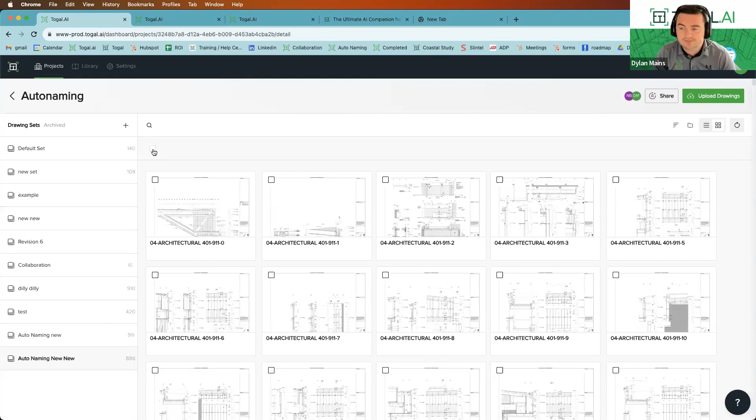So starting off with our auto naming. In most softwares out there today, you still have to name your plans one by one. Togal has created auto naming, so this will save you some hours at the start of your takeoff process. Togal is also cloud-based, allowing you to log in from anywhere. You can start on your work computer and pick up where you left off at home on your home computer.

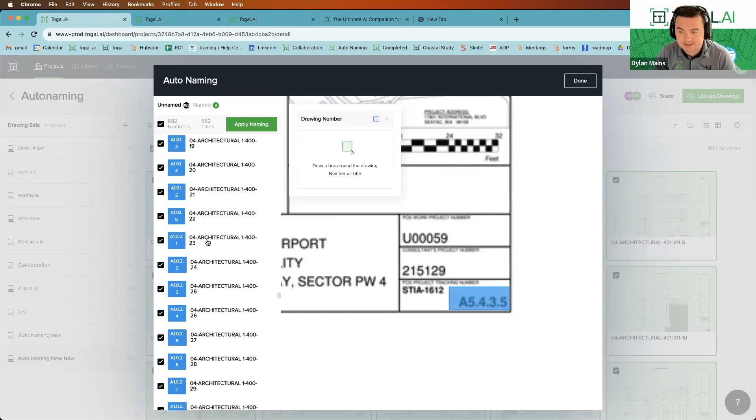For the auto naming, all you'll need to do is point to the number down here at the bottom right, set it as a number there. You'll see instantly, this is like 882 pages, I just numbered them all that fast. And then same for the title, just point to the title block, and voila. So much faster than even some of the softwares that do have auto naming, it doesn't work this fast. It's pretty incredible.

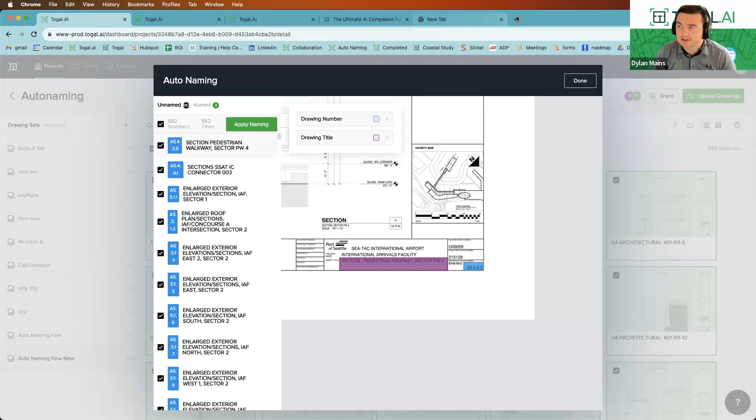The next thing I'll show here is our collaboration. In some of these larger projects, being able to work together is really important. Obviously this is an elevation, not flooring here, but hopefully you get the idea. With Togal, you can have multiple estimators working together at the same time, even on the same plan at the same time. You can see we can work here in separate views, like just one person uploads the plans.

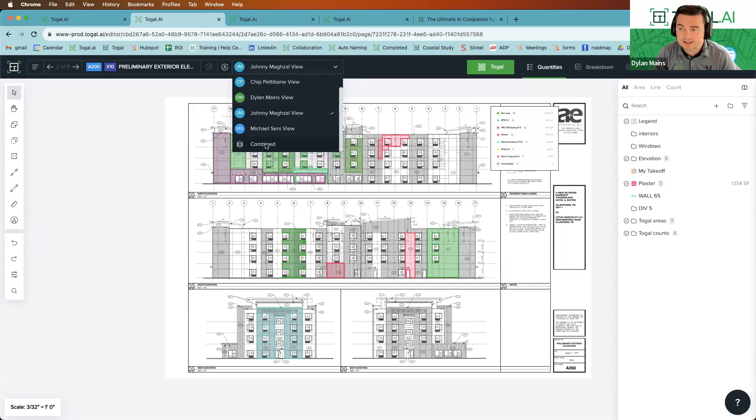You just invite your team in, set their different permissions here, and then we can start doing takeoff. So you can see what I did here versus what Johnny did. We can combine all 4 estimators' takeoffs on top of each other to see where we're at as a whole, and we can export together as well.

Like on this example here, you can see we actually missed some areas, but it's really easy to catch that. Being able to overlay all the takeoffs on top of each other versus working in separate environments, some of that stuff can easily fall through the cracks.

And then from there, getting into some flooring specific stuff here. Even before you start doing your takeoff, you want to first just understand the project. Is this even worth our time? Is this a job we want to go after? And this is where Togal GPT can help.

Togal GPT is Chat GPT-4 built into Togal. The biggest difference here is that it's extracting all the text from any of the documents you've uploaded - your plans, your specs, your contracts, etc. - and interpreting it. So you can ask a question like 'any info on interior finishes' and it'll summarize all the different interior finishes it found throughout the project, and even give you references to those pages so you can go right to them. I also said create a bullet point summary of flooring for this project.

In this case, this is ideal, right? It's all the same flooring throughout the entire job, but that's what we got here. And then again, referencing all the pages that are referencing LVT. This is a big multifamily project. And then I had it also create me an RFP for flooring based on the information it found in the project.

You can also leverage this to write RFIs too. Like say, for example, it didn't have the brand of LVT that was specified. I could say, create me an RFI on behalf of XYZ company, directed to the architect, requesting more information on the manufacturer of LVT required for the project, and it'll write out a whole RFI for you.

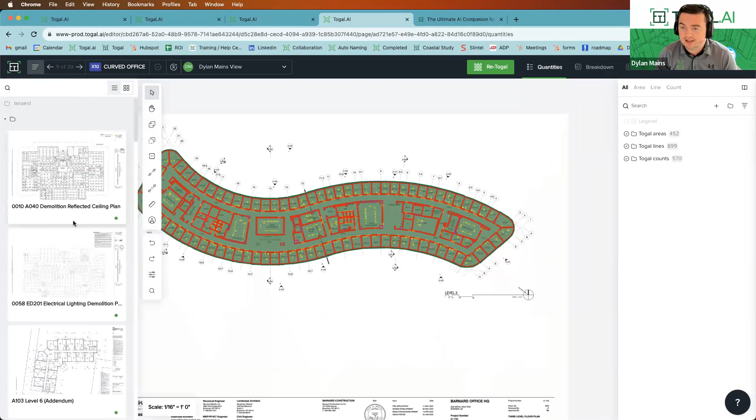So this plan here, Togal did all of this here that you're seeing automatically. Let me show you though on a bit of a smaller plan, and we'll show you how this works from start to finish for flooring. I'm going to erase all this here.

So with most softwares out there today, you have to come in here and click and trace all these rooms out, right? For flooring, go to the half mark of the door lines of the doorways, and it's going to take like a half hour to an hour per plan.

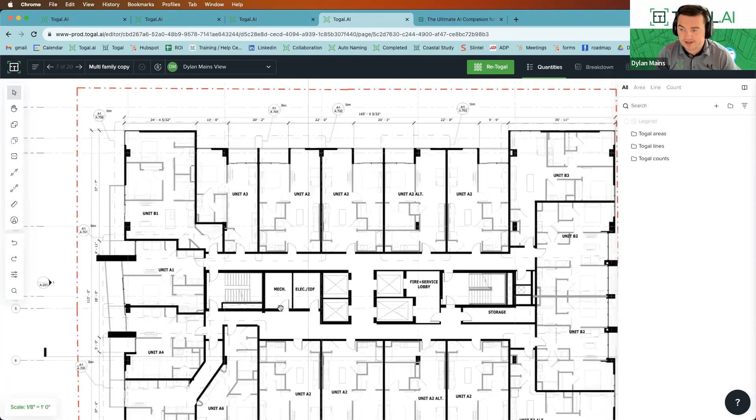With Togal, we can cut that down dramatically by leveraging AI. So I click the Togal button here to give me some options of what I want to pull on this drawing. So I can get the net area, gross area, footprint, door areas, the walls, and also all the count objects. I'll click go here.

I'm just going to run everything for this example. And just like that, let's turn this legend off as well. But it's done a lot of things here. So it counted all the different objects that it sees in the plan here, the toilets, the sinks, etc.

which maybe in the past it's not something you guys even counted, was all the toilets, for example. But now with Togal, it does that, and obviously there's a bit of extra labor, like extra cuts when you're cutting around a toilet hole in the ground. So you've got that now, so you can kind of factor that into your estimates.

All the doorways as well, that's your transition strips typically. So you've got that, and then all the walls, you're doing wall tile, that kind of thing. We've got those drawn in for you, and then the areas here.

So we'll focus on the areas here, obviously. So we got net area, footprint, gross area that goes to the half mark of the interior walls, the edge of the exterior walls. But for flooring, we'll focus on net area.

So I'll click on the net area here, and then I can right click and click auto classify. What that's going to do is auto classify my different room types. So now I can fly through a takeoff.

So it separated my bedrooms, my stairs, my living areas, my corridors. And notice every click there, by the way, is like every dot here is a click. So it just did hundreds of clicks for me, saving me a lot of time.

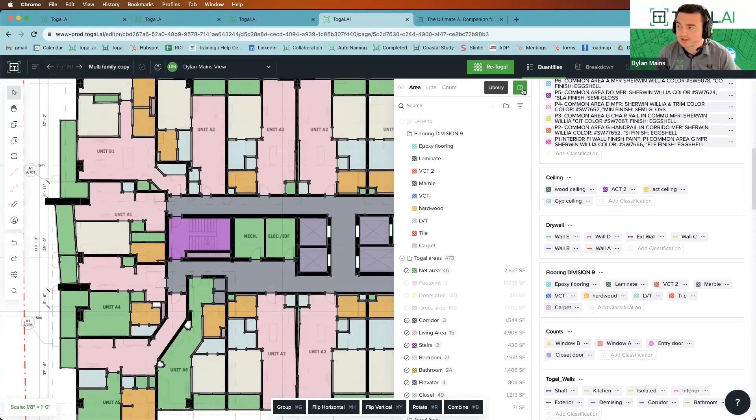See, I've got my different flooring types here. This example, we'll just kind of run through and do a quick takeoff. So let's say all the bathrooms are going to be tile.

One of the cool things with tile, for example, and I can create this from scratch as well. Let me just edit this one though to show you. In most softwares today, you've got to not only measure the tile in each bathroom, for example, but then you also have to measure the tile base.

With Togal, not only does it measure it all for me, but I can get three quantities on one condition. So I can get the area for my tile, my perimeter for my tile base, and even a tile count factoring in the grout lines. So saving you time there.

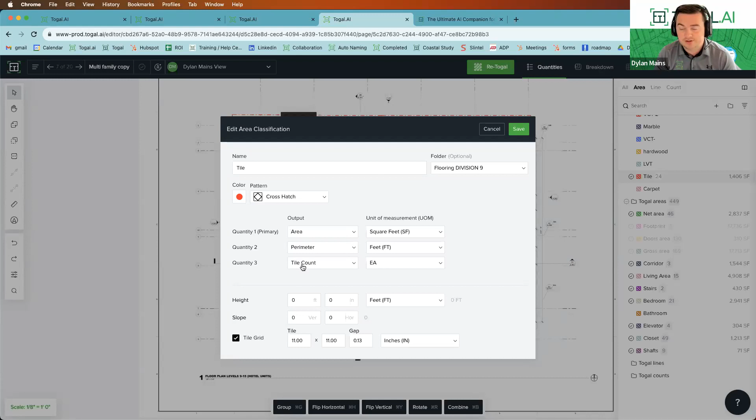Like in most softwares, again, you have to click it, you have to trace those rooms out twice. In Togal, you don't even have to trace the room out once. So I just took all the bathrooms there.

We'll do the living areas. We'll say these are going to be VCT. And then we'll say all the bedrooms are going to be carpet.

And what I see a lot of customers do is while they're doing the takeoff, because Togal is kind of opposite, right? It's measuring all the rooms and then you're telling it what goes there, versus telling it what goes there and then going and measuring them in most softwares.

So what you'll do is you can just turn off what you've done so far and you can see this is what I have left. I've already knocked out a big chunk of this takeoff.

All I have left here is the closets and the corridors. And I can label these here real quick as VCT2. And then I'll do this corridor here as carpet as well.

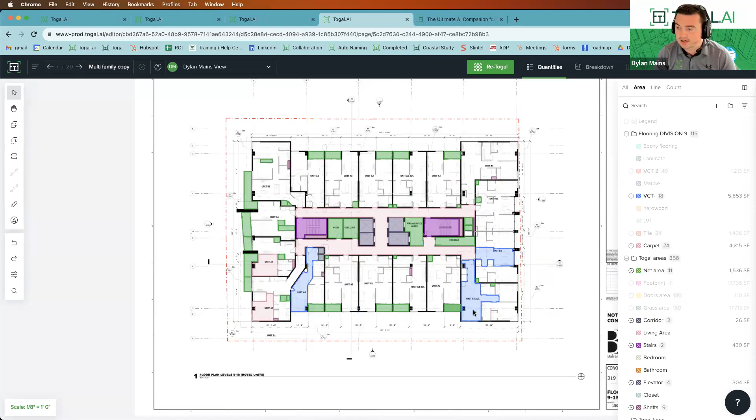And I missed a few areas here, but I can easily add those back in. These were the living areas, and these are some of the bedrooms it missed. I'll call this carpet. And I've pretty much taken off this entire plan that fast.

So no matter how complex the plan is, no matter how big the project is, it's always going to be this easy, basically because it's done all the clicking for me. I just have to tell it what goes where, and it speeds it up drastically.

One of the things you'll run into sometimes though is because Togal looks for doorways to split off areas. So it's looking for a doorway and it knows that's a separate area. But let's say this lobby area here just so happens to be a different type of flooring. How do we deal with that?

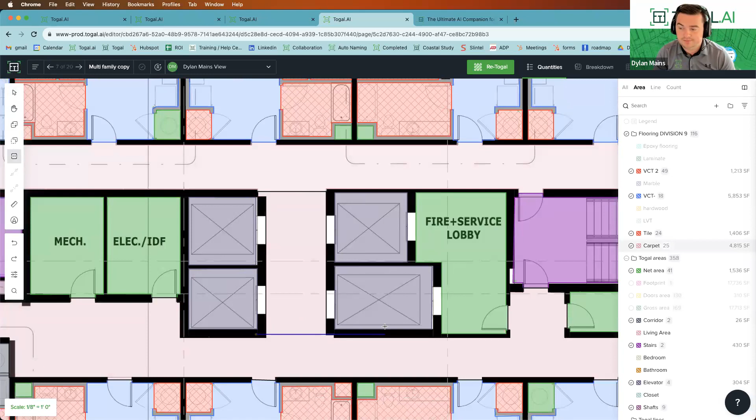So Togal made this one big area, right? What we can do is use our split tool. Come over here, click on that, or just press S on your keyboard. You can just drag a line through, and then drag a line through here. And this area here can be tile, for example, while the rest is still carpet.

That is pretty slick. We kind of ran through that quickly. Obviously, there's a lot of other stuff I can show you, like our cut tool. You can cut, like let's say it's carpet on the edges and tile in the middle here, something like that.

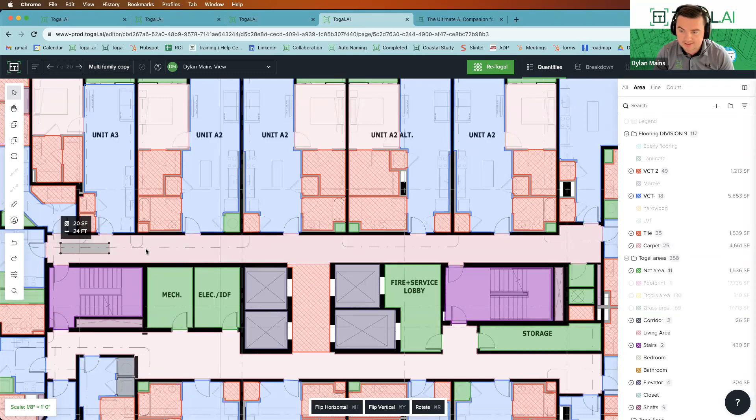And maybe it's like every so many feet, like this. I can cut that area out, copy that, and then paste it down the hallway here. Press Control Shift V, it'll paste it equidistant over and over again. Then I can click on one of these, assign and fill these in with, let's say this is like getting a patch of tile as well, all in the hallway, and there we go.

So it's cutting that area out from the carpet, and then separately I can fill it in with whatever needs to go there, versus cutting it out and then having to separately trace that area out. Some of the other random things, you can actually cut from an edge. A lot of softwares out there today, you cannot do that. So if I need to cut out this section here that's not going to be floored, I can just do that, no problem.

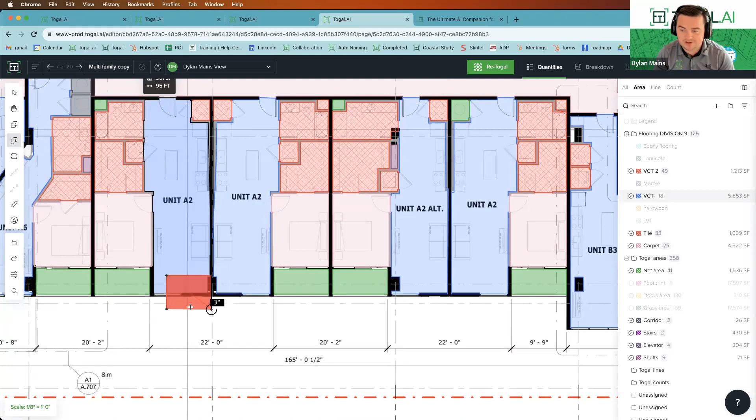You can merge areas.

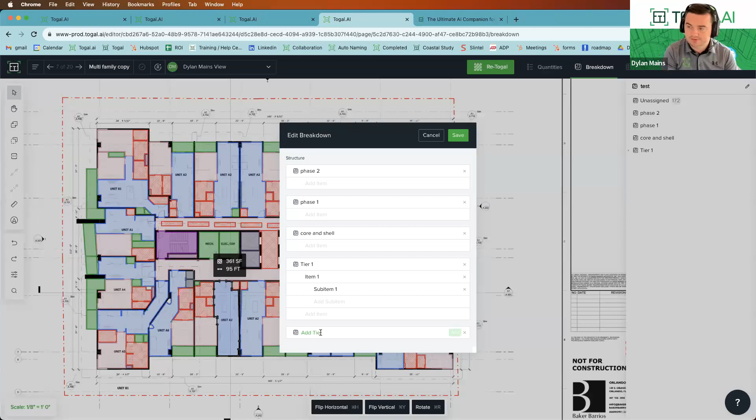Then from there, I'll show you our export tool. So you can set up breakdowns, like say there's different phases of the project here. So I'll create a phase here. We'll just call this phase 1, phase 2. I kind of already got that set up actually. We'll just roll with that.

Let's say this half here is going to be part of phase 1, and this bottom half here is going to be part of phase 2. Now I can isolate between those separately, and then when I go to export, I can leverage that to kind of segment my data how I want it.

So in Togal, you can export multiple drawings at once. You can add in multipliers for your typical floors, typical units, that kind of thing right here within Togal. So I'll just say times 5 here as an example, and you'll see everything updated there by 5.

And I can group my data by drawing, so that's everything in this drawing here, but then by classification. We'll do it by breakdown tier, so that's the breakdowns there, and then by classification group. The grouping there is my folder, so now I know in phase 2, for the flooring division 9 section, here's what I have. For phase 1, here's what I have.

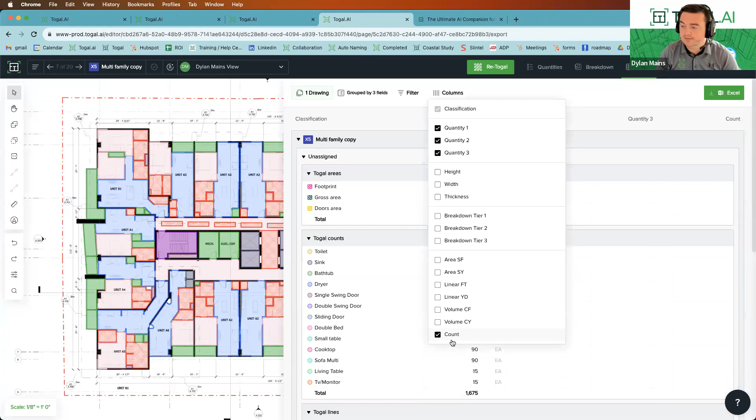I can copy and paste right from here into Excel. One of the cool features I like too, you can add in a column here for counts. See there, and now I know not only how much square footage of VCT do I have, but also across how many individual sections. In this case, there's 40 sections of VCT, a bit more labor than if it was one huge section, obviously. So factor that in for my production rates, export this to Excel, and then start putting prices and stuff.

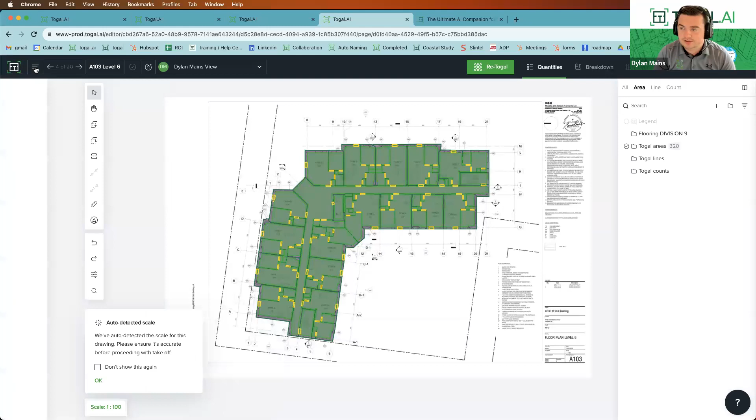The last thing I'll show here is our comparison tool. So when you get new revisions or addendums, how do you find what changed? Again, Togal being cloud-based - let me fix this alignment here. We do have automatic alignment as well.

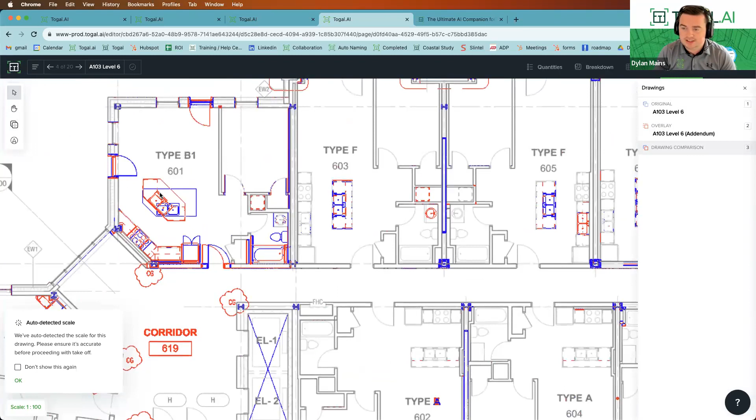So you can see here, the original is blue, red is the addendum, and some of the stuff's really obvious, like that island changed. But some stuff's not so obvious, like this bathtub here - what exactly changed there?

So we have a keyboard shortcut. You can press T on your keyboard to toggle between the two revisions here, and quickly see. Obviously, they added a knockout wall there.

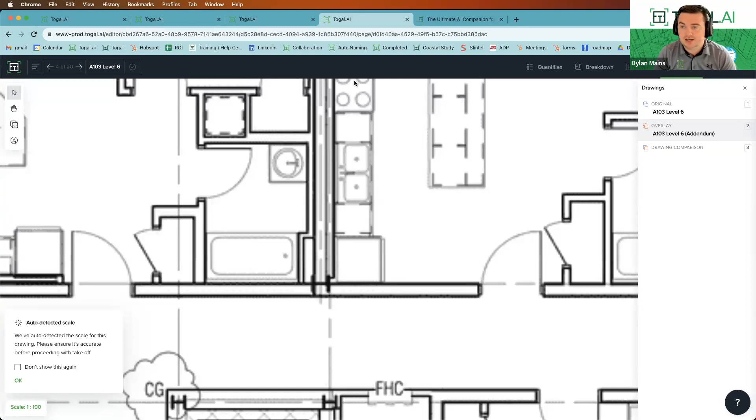And then I can open up another tab and put that on my other window here and make the changes to the takeoff. You can have as many tabs open as you want of Togal - it's not going to really slow your computer down. It's cloud-based, it's a lot lighter on your computer. You can also export the PDF with a legend as well.

Any questions so far? We're also happy to do a custom demo of Togal from your plans as well. You can come to our site and book a demo right on the homepage, and we're happy to show you a custom demo from your plans to show you that it doesn't just work on our perfect demo plans here - it works on all plans.

Oh, someone's raising their hand here. You can just type your questions in the chat, or I guess I can allow you to talk as well, it looks like. Got one in the Q&A here, I see. Oh, I see Q&A, okay. Hey, it looks like chat is disabled. So, oh, you want it in the - oh, Q&A. Okay, I'll put it there instead.

How would you account for wall tile? Yeah, so let me go back here. All the zoom things stuck in my way. There we go, I'll go back in here to the walls.

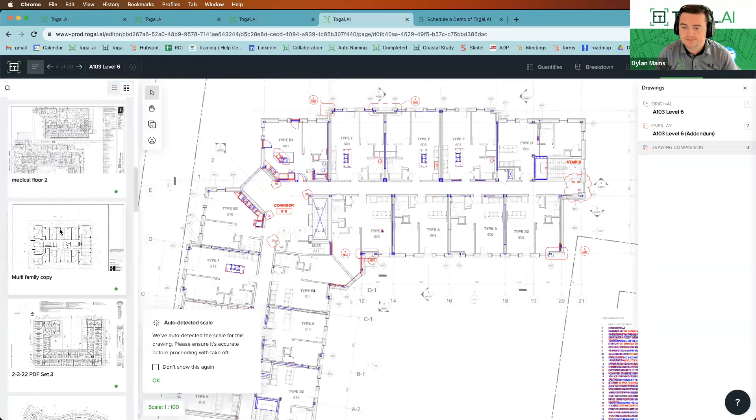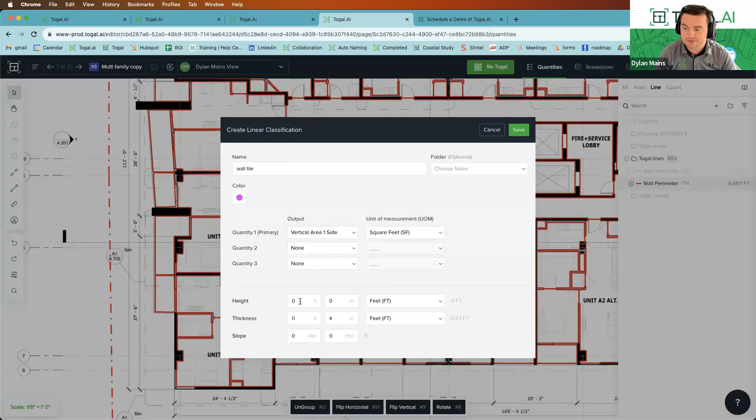So a couple different things here, because like I showed you, it does draw the walls in for you. So you've got the wall perimeters, which is like the room perimeters here. So I can click that whole room - if it's all getting wall tile, then it makes it really easy. I can just click on this and wall tile - I need the vertical area, one side of the wall. It's going up 4 foot of the wall, and 98 square foot of tile there.

If only one of these walls is not being tiled, I can ungroup this in this case. Let's change this back to wall perimeter. The other option is we can use our wall center lines here.

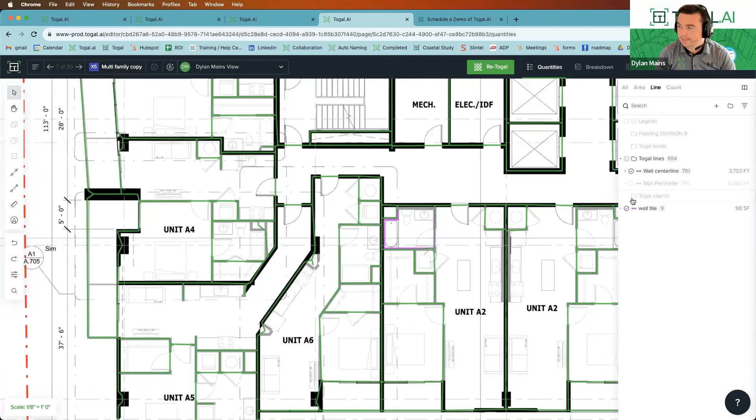We also have auto classify for walls as well, where I can right click on this, click auto classify. It's going to separate my different wall types out, and it does do a pretty good job of getting my bathroom walls there. There's a few it might need some edits here, but just to quickly do this, I can right click on all these, and I'm going to call these wall tile - voila, less clicks, and now I can isolate to just this and see what else I need to grab. Maybe there's a few here that I need to do some edits to.

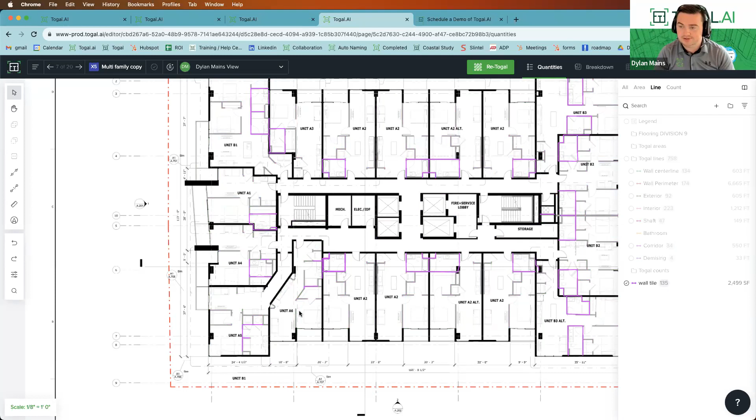All the same manual tools you've got in other tools here, just keep in mind we have as well. I can manually do a takeoff in Togal too, like that. But yeah, hopefully that helps.

Few others in the Q&A there. Don - the window treatment one, I can show you that in a second here. Joe - I love how seamless and fast it is, will there be a tile size and waste calculation in the future? We do already have tile size, actually. I know I went really fast, sorry, I just need to slow down a bit probably.

Let me show you that - oh, it's under the flooring here. So that's VCT.

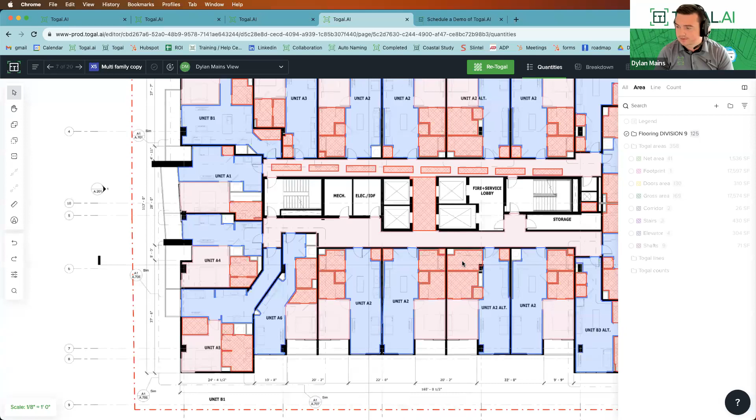So on my tile condition here, I also added a quantity 3 for tile count. I put in the size of my tiles, the size of my grout lines, and then I can save that, and it gives me the tile count. On quantity 1 here is all that shows on the export on the quantity pane, but when I go to the exports I'll see quantity 1, 2, and 3, which is quantity 3, there was my tile count. I can see here quantity 3. So there's 3,330 tiles needed there.

But waste factors, that gets into the estimating side. Our focus now is saving more and more time on the takeoff. That's where a lot of time is monotonously spent, and we want to speed that up as fast as possible. The pricing is where you want to spend more time, finding ways to value engineer and get your prices down.

Tile patterns, that's something we can discuss. Carpet tile, yeah, same exact way. You just put the dimensions of your carpet tiles or your VCT tiles, and it will calculate your tiles.

Oh, window treatments, let's show that real quick. This is actually our newest update. Just a couple weeks ago we added this in, and I was not prepared for this, but I can pull it up quickly. Window demo here. So we now have image search as well as text search that you can use on plans. So you can leverage this to quickly search those window tags and door tags for your blinds.

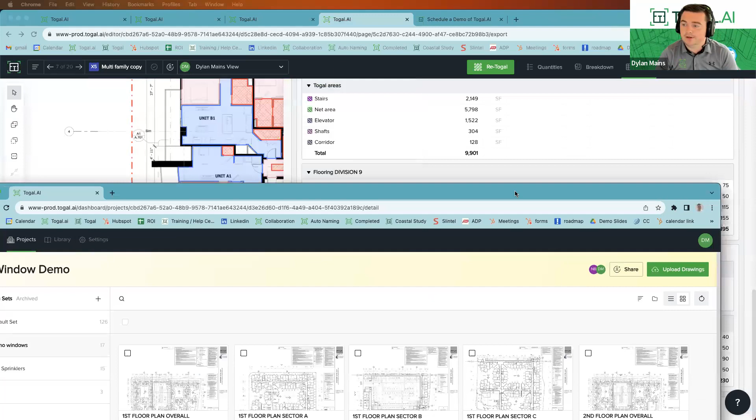Let's back up here. All right, so on this one here, this is an example where you've got the window tags labeled in there, so that's ideal, right? You've got the W6, the W5, etc. So in Togal, we have text search. I can just type in W6 here. It gets all of them, all 57, and I convert that to my W6 windows.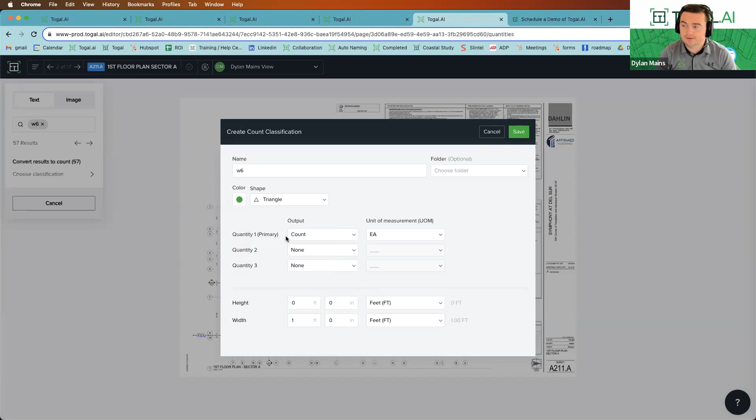Maybe that's a certain size blind. I can put in my dimensions of that. I can pull some measurements on those and save it, give it a different color, shape, etc. And that fast, I can get all my W6 windows. You just do the same thing for each different window tag.

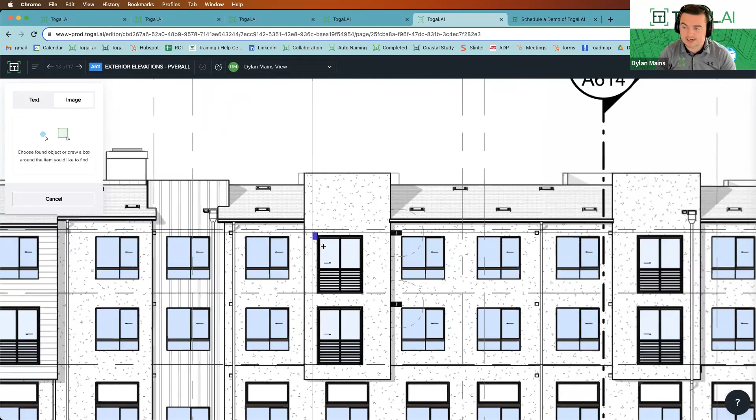The other option, this is our newest update, is now we have image search as well. And this is really cool. So you can search, say there's no tags on windows here. As long as there's an elevation, I can come to this, point to one of my sliding glass doors for example, search for that, and it's going to find all of them for me without me having to click on each one of those.

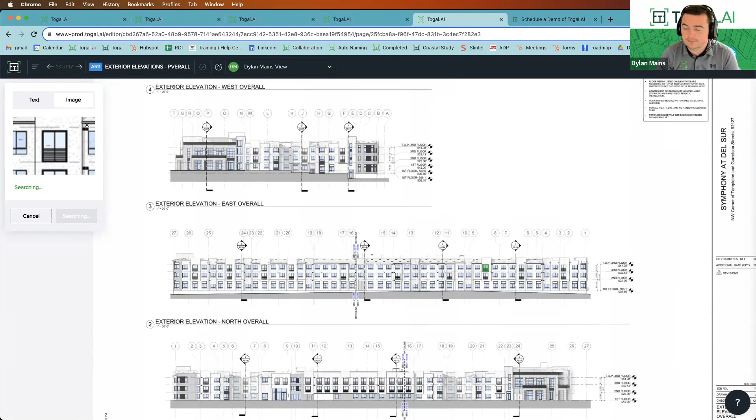And notice there's no calibration or sensitivity levels. It just highlights one of the things you're wanting to search for, and it goes and finds them. And this works with all trades. If you want to search for your outlets or anything like that, you can use it for that as well.

And with tile patterns, we don't really factor in the patterns right now. It's just getting the raw square footages and a count based on the size of the tiles that would fit inside there. But it's not accounting for how much waste you're going to have with different patterns, because again, we're focusing on takeoff, not so much the estimation side.

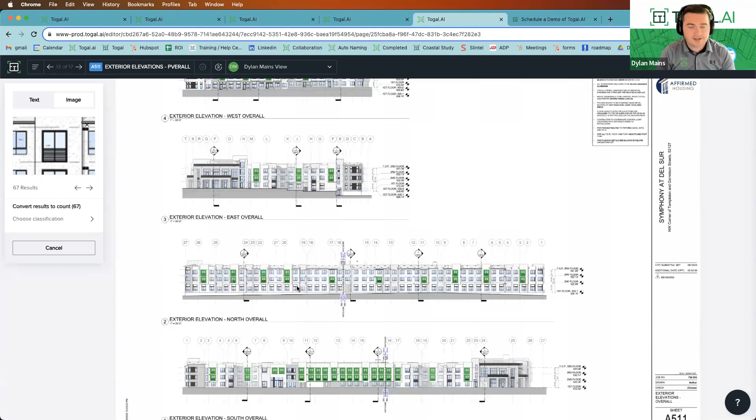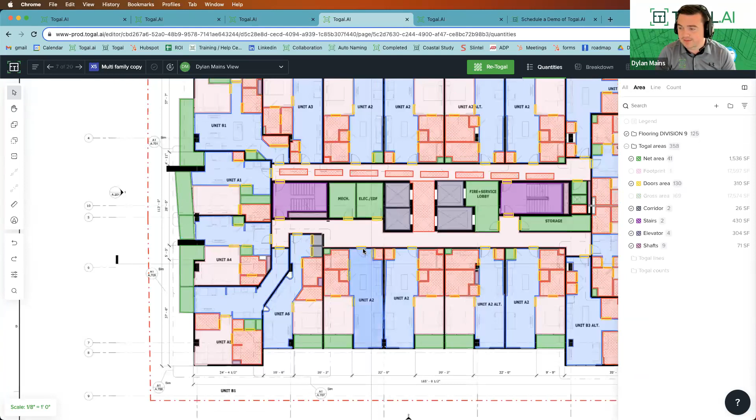Yeah, the transitions, like I said, there's a few different. I can answer this live here. So does Togal allow us to do seaming? Also, how about estimating transitions with floor patterns? If I come back here, my areas here, and turn this all back on, it does give me my door area, so it's measuring every doorway for me, and then getting the area of that. So that door area is kind of like my square footage of transition strips.

If each room is a different transition strip, I've also got a count of my different rooms here. Can leverage that for transition strips. It also counts every doorway as well. So there's a lot of different ways to get there. Depends on the job and what is needed to get the answer you need.

Like for example, it counts all the doors here, single swing and double swing separately for me.

Yeah, the image search exactly, yeah. And it works really well because we're leveraging AI for that. So we've A/B tested that feature against other major softwares out there that claim to have an image search feature, but they're all using OCR, and ours was far superior.

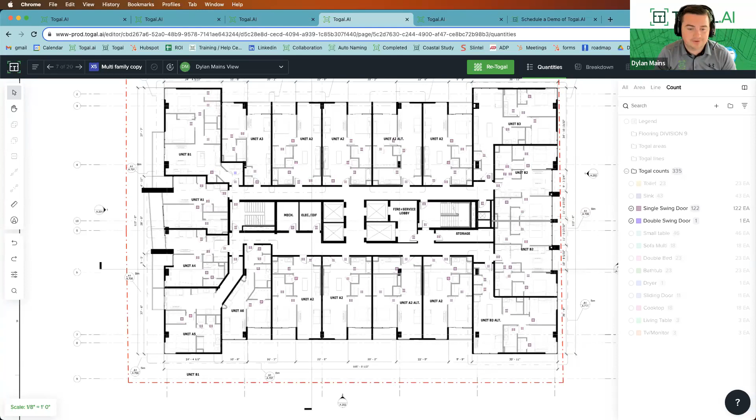Alrighty, this is a quick one.